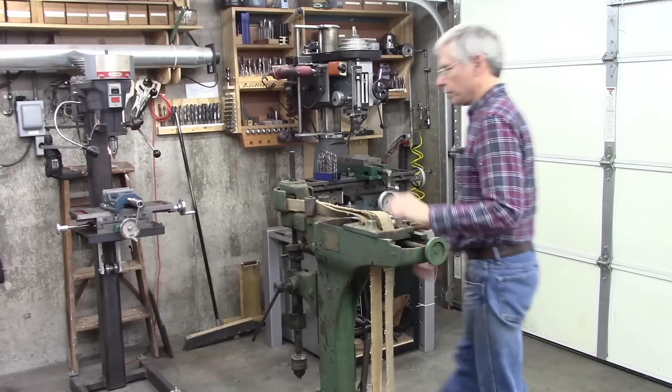Well, look what followed me home the other day. Actually, this and a lathe followed me home. Got a pretty good deal on them. I need it like a hole in the head, but I just couldn't pass it up. It's a really unique drill press. It's a table model. Let's take a little closer look at it.

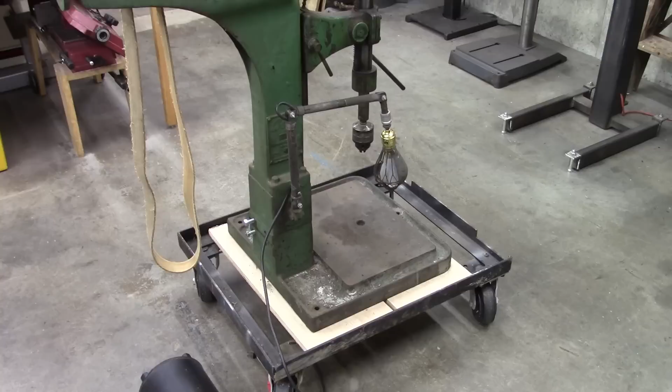Well, there it is. I've got it on a roller stand so that I can roll it outside and clean it up. But it's 32 degrees out there today, and it'll probably warm up pretty soon, but it's too cold to clean it up right now.

So, first thing we got to do is build the drive on it. And the drive, there's some bolts down there at the bottom, bolt holes, and that's where the drive is going to bolt on.

It's a big challenge on this drive getting the speeds right, because right there is a fixed 4-inch diameter drive pulley or driven pulley on the spindle. So I've got to design all the drive back here on the back side where I can change speeds.

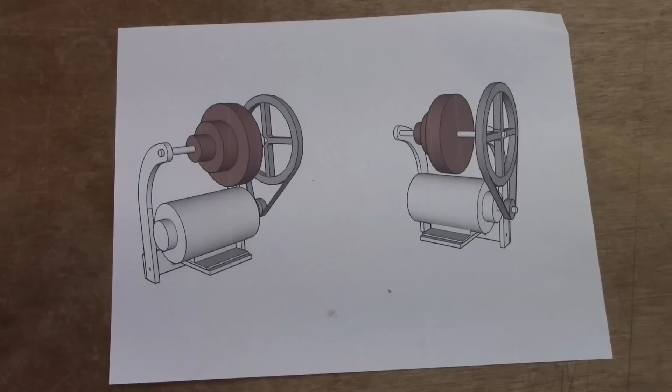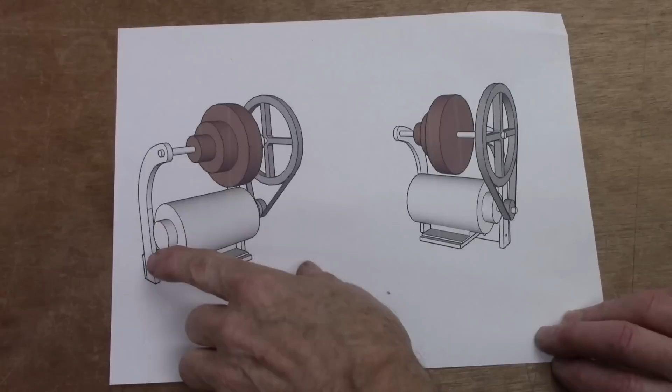Here's what I came up with. This hangs off the back of the drill press, and that's a 1750 motor going to a 12-inch pulley there. And these step pulleys I'm going to make out of wood, and that's 12, 6, and 3-inch. And right there bolts to the back. But that's the piece we're going to make first.

But I made a large CAD drawing. Billy at Knox Machining called it CAD, but he was referring to cardboard aided design. You'll see what I mean here in a minute.

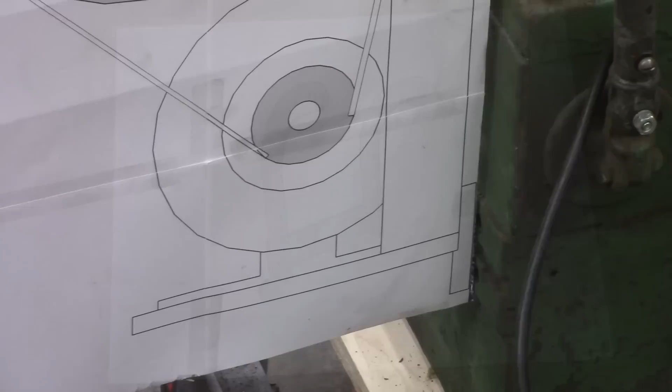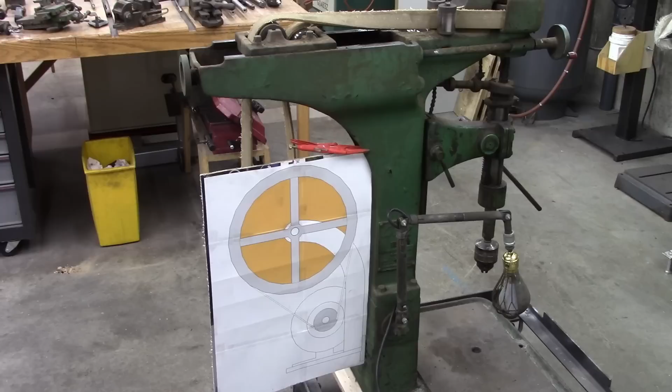Okay, there it is, printed to scale, sitting right where it will be mounted on the drill press. It's a pretty good way to do that. Printed it full size and then taped it together and put it on a piece of cardboard. Good way to double check sizes, make sure it fits.

Here's what I got with the drill press, and we will restore this at a later date. This is a Hardinge Cataract lathe. I'm guessing about a 1920 or 30 model. It's a precision lathe. It's not in super good shape, but it's in decent shape, mostly cosmetic.

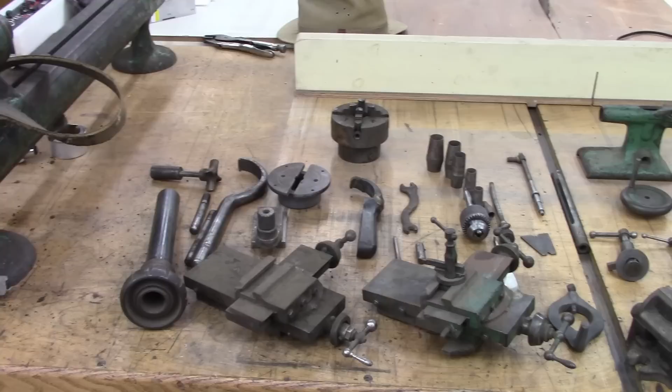And here's what came with it. Maybe a later model than that. I'm really not sure when it was made. There's a couple of cross slides, faceplate, a 4-jaw chuck. There's the tail stock. It's been in pretty bad shape. That's going to be a challenge to fix up. Got a couple of big reamers and a couple of extra vises in with the mix.

That vise right there is going to be a video. It's a quick release vise. It's got some broken castings on it, but we're going to fix that. Anyway, let's get started on this drill press.

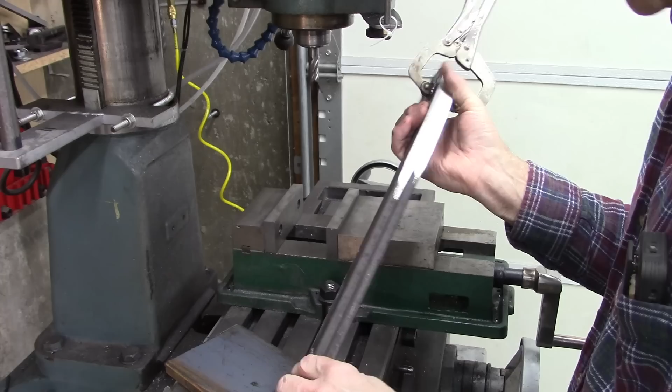Okay, that's my 2 uprights, and that's going to be fastened to the back of them on each end. And I want everything to be lined up. You can see I got a little bit off out of alignment there. It's pretty close down here. I got bolts in it and a pair of vice grips there just for some added insurance.

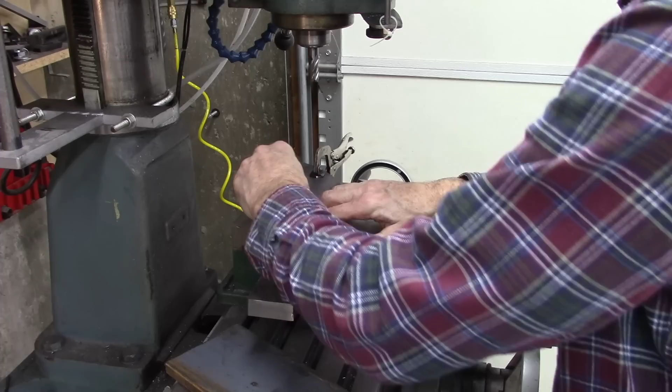And I'm going to clamp this in here. I'm putting a round pin here so that it's flat to this jaw. Now, technically I should be - well, I'll tell you what, you're always supposed to work off the back jaw. So let's flip that over and work off the back jaw.

There we go. Now I want to mill this to give me a machine surface to attach to here. If that didn't make any sense, it'll be clear in a little while.

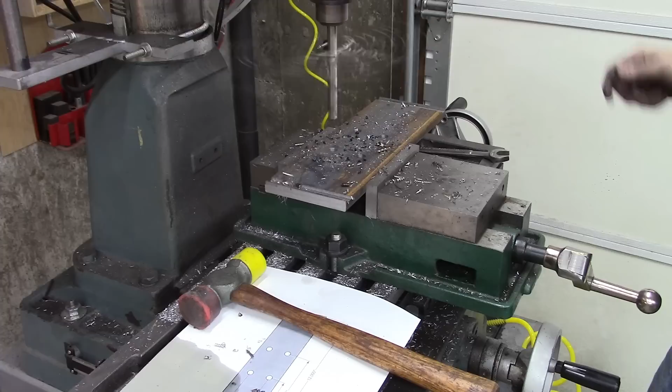Yeah, I don't have the right bolts, but I'm not going to get some shorter bolts. Can't ask for a better fit than that.

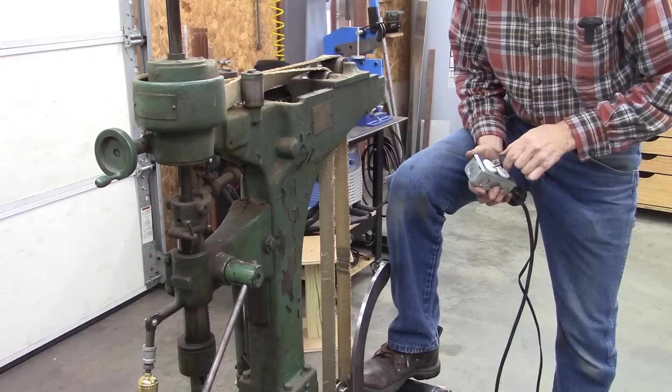Well, I like it. Give this thing a little test run. Very crude test run. Cool. Looks good to me.

Well, let's talk about what direction we're going here. This is going to be a cone pulley, a wood cone pulley on a sliding shaft. I'm going to drill a hole in them, cut them to rough diameter, and glue them together. It's kind of unconventional. It's going to be a sliding pulley.

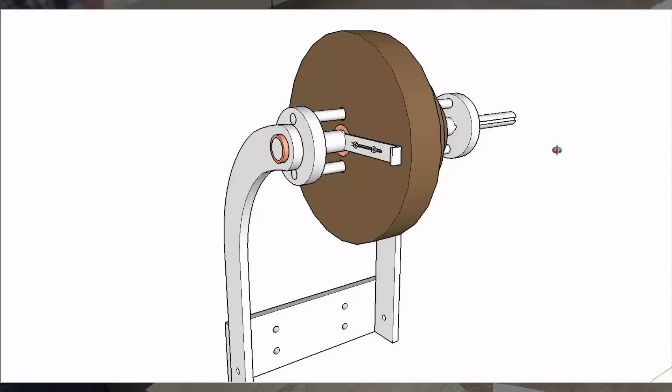You notice the wood has a brass bushing in there, and the two 1/2-inch bars are what's actually driving the wood pulley. And then there's a little lever that you can pull out that sits in a groove on the shaft to stop it from sliding back and forth.

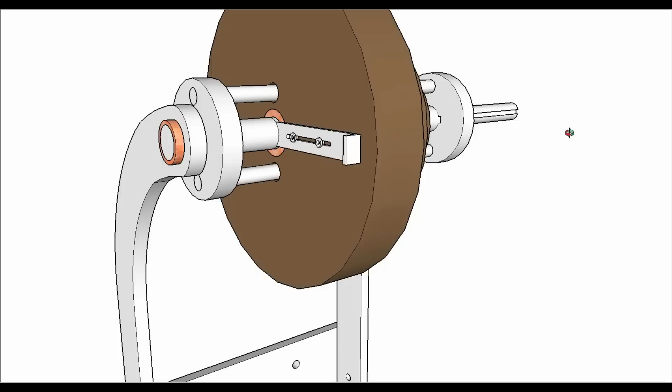That's a 1-inch shaft, and the step sizes are 4-inch, 7-inch, and 10-inch. Anyway, that's the direction we're going. So I'm going to drill these and cut them to rough size, and then turn them on my CNC lathe.

Looks like I got good squeeze out everywhere except right here. Actually, there's a little bit coming out now. Yeah, maybe a little bit right there.

I'm done sanding it, and I'm going to put a coat of black stain on it. I used it on a speaker cabinet a while back, and I really liked it.

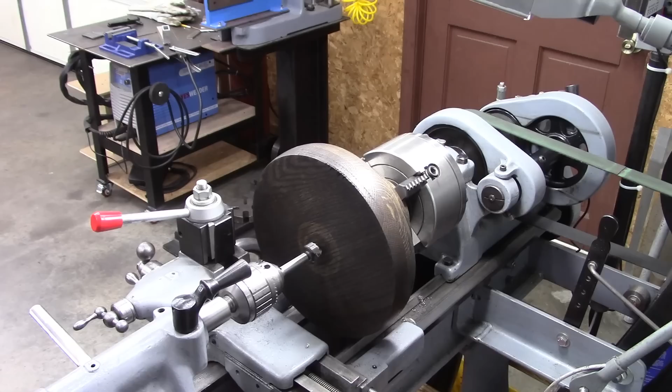Well, I got this thing chucked up on my metal lathe, and I'm going to get sawdust all over my lathe. I'm going to try to bore it for some bushings with a boring bar all the way through, and I don't know if that'll succeed or not.

First, I'm going to use this Forstner bit. Well, my battery went dead, so I'm not sure what I missed recording, but I made an extension for my Forstner bit, and we're going to go all the way through with it.

Alrighty. Good deal.

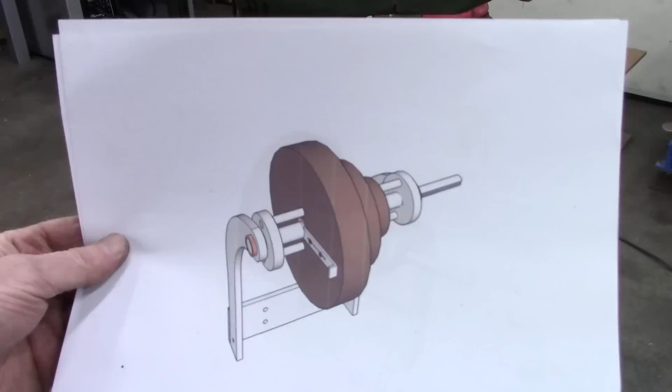Well, I still need to drill 2 through holes in the pulley and make these 2 things, and cut some grooves and keyways, and quite a bit more to do. I think that wraps it up for today, and thanks for joining me.